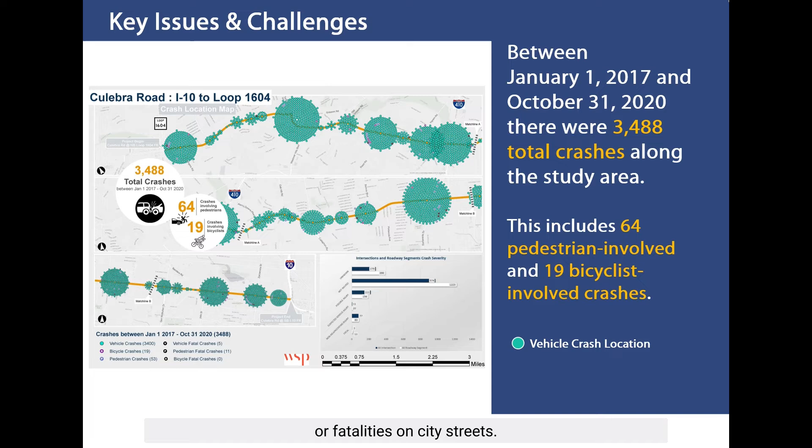This provided the foundation for the Culebra Road corridor vision. The community clearly told us that the number one goal should be safety for all users of the street. Secondly, they told us to manage the traffic speed, slow down drivers, and provide better walking and cycling connections. In addition, we clearly heard the community wants to see shade and comfort settings along the street. This could include new trees, plantings, and other amenities. Also, residents want to celebrate the unique identity of the neighborhoods along the corridor. Lastly, the community clearly told us that this plan and its proposed concepts should help support local mom and pop businesses and create opportunities for economic development.

Now, as we look in this corridor, we clearly see the 5 key segments, and we are going to walk through each of them one by one. Each segment will have 2 proposed concepts. No decision has been made on which concept will move forward, so please be sure to let us know what you like in your comments.

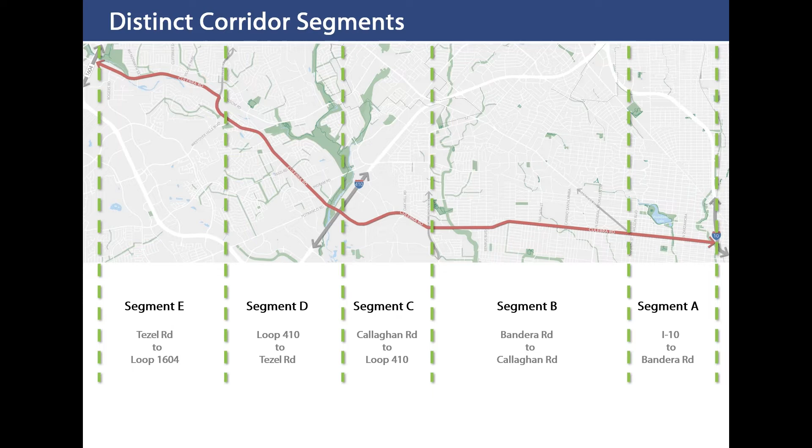The 2022 bond program allocated approximately $18 million that will support infrastructure improvements on Culebra Road from I-10 to Callaghan Road. The bond project is pictured here as segments A and B.

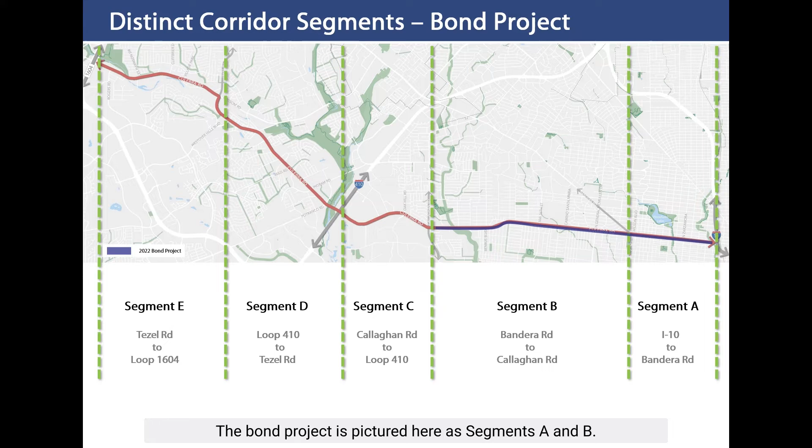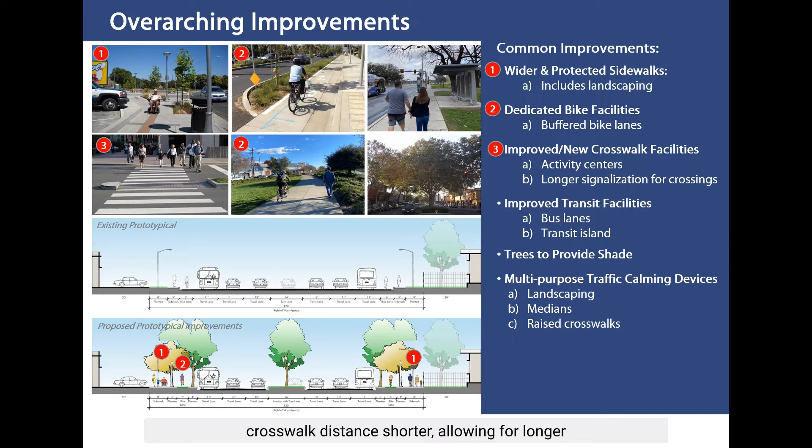Across all 5 segments, there are overarching common improvements. 1. We clearly heard from the community the support for wider and protected sidewalks. 2. We heard the need for a continuous dedicated bicycle path that would be protected from the moving traffic as seen in the photograph labeled 2. 3. We heard the need for improved crosswalk connections and, where possible, new crosswalks at key locations such as near existing schools, trailheads, and other community destinations such as a grocery store. These improvements could include making the crosswalk distance shorter, allowing for longer crosswalk timing, and providing a pedestrian refuge area on shaded mid-block crossings.

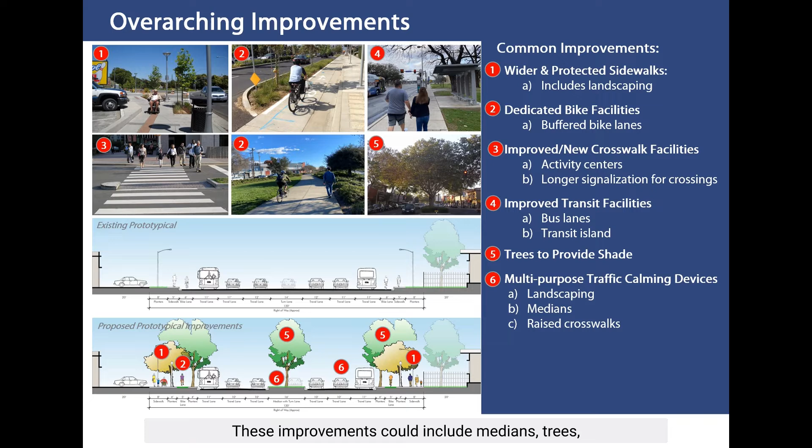4. The community asked us to incorporate improvements to transit facilities and their locations along the corridor. 5. Ensure shade via trees along the sidewalks as well as the medians. The 6th and last common improvement is to incorporate traffic calming devices. These improvements could include medians, trees, reduced travel widths, and better access management for vehicular traffic.

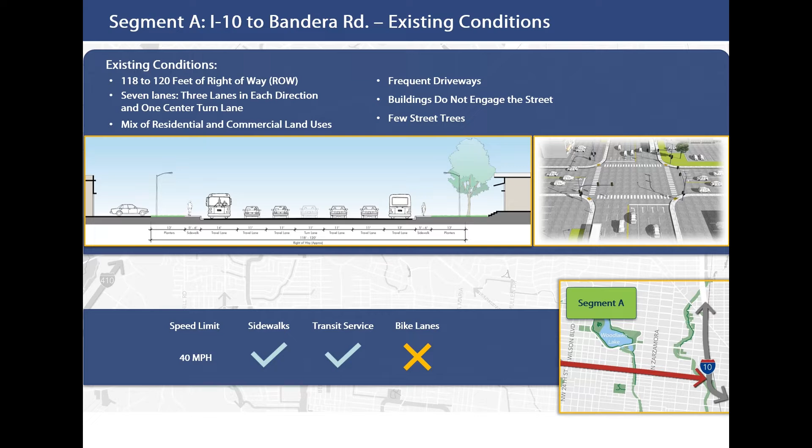The first segment to discuss in more detail is Segment A, which extends from I-10 to Bandera Road. It is about 120 feet wide and has 3 lanes of traffic in each direction with a turn lane in the middle. There is a mix of residential and commercial users with multiple driveways and very few trees. There are no bicycle lanes in this segment.

The first concept for Segment A would include protected sidewalks and bicycle lanes on both sides of the street. These paths would be protected from moving traffic with tree-lined planters. We also propose a median with trees in the middle of the street. This concept maintains the number of travel lanes within the existing right-of-way.

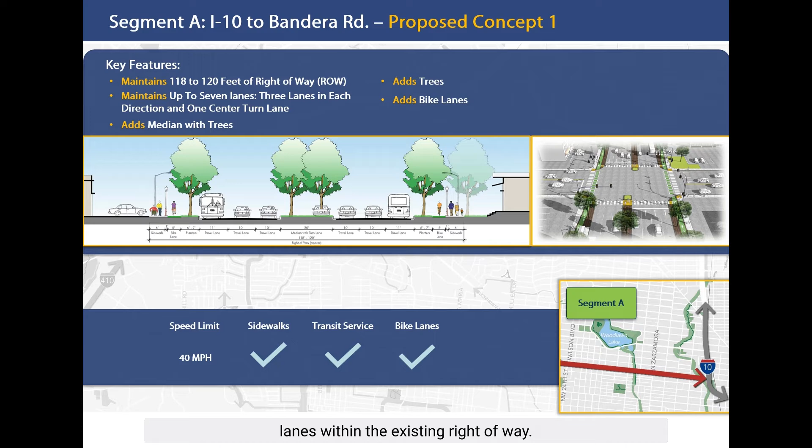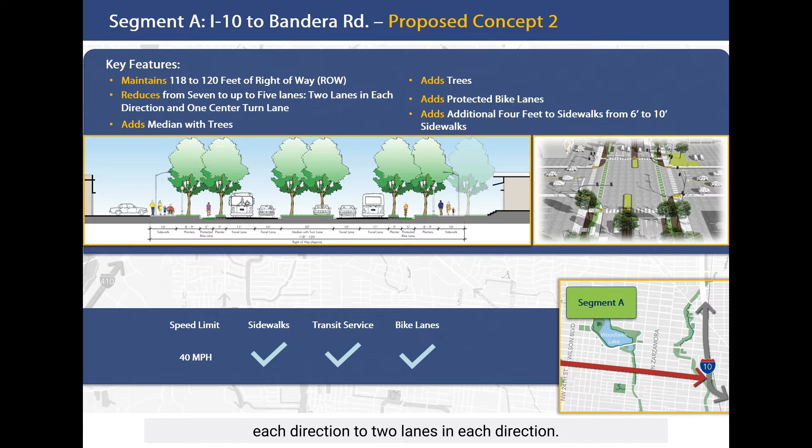The second concept for Segment A reduces the number of travel lanes from 3 lanes in each direction to 2 lanes in each direction. This will allow more space for folks to walk and bicycle along the street and will provide further opportunities for the shade and protection provided by new tree plantings.

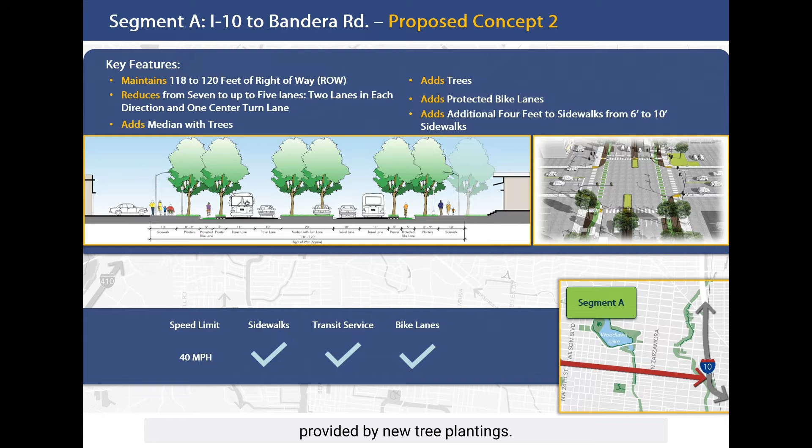The second segment, Segment B, goes from Bandera Road to Callaghan Road. It is a much narrower road, about 80 feet wide, and it has 2 lanes of traffic in each direction with 1 center turn lane. There is a mix of residential and commercial uses on each side and very few trees. There are no bicycle lanes in this segment.

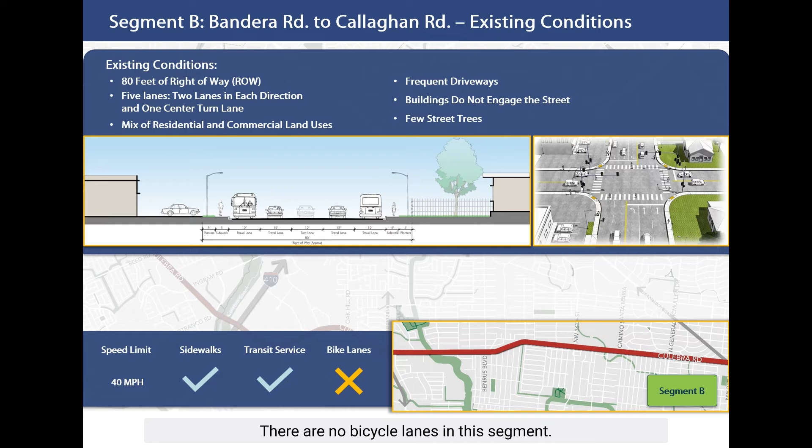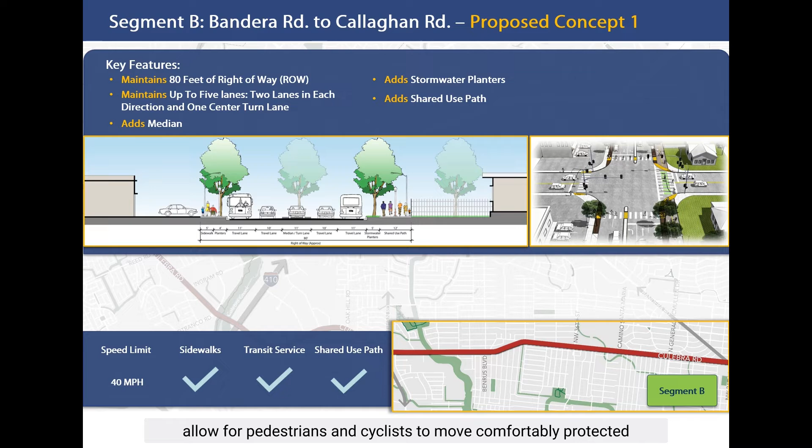The first concept for Segment B would add a shared use path on one side of the street, which would allow for pedestrians and cyclists to move comfortably protected with a tree line buffer. On the other side of the street, we propose a sidewalk.

The second concept for Segment B would include protected sidewalks and bicycle lanes on both sides of the street. These paths would be protected from moving traffic with tree line planters. It has also been proposed to add a median with trees in the middle of the street. This concept maintains the number of travel lanes within the existing right-of-way.

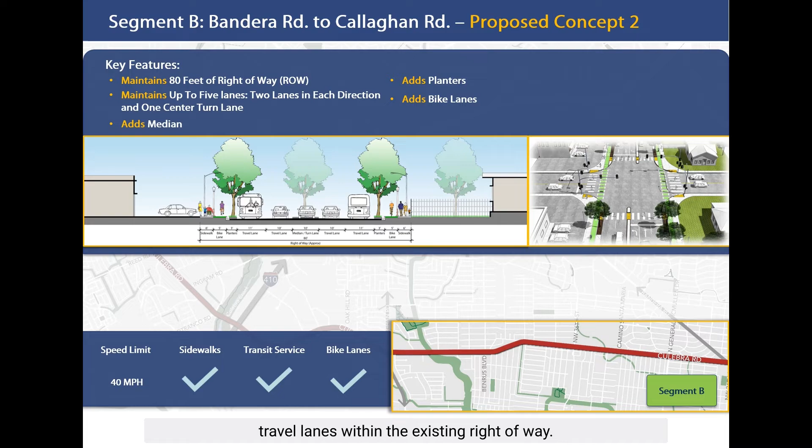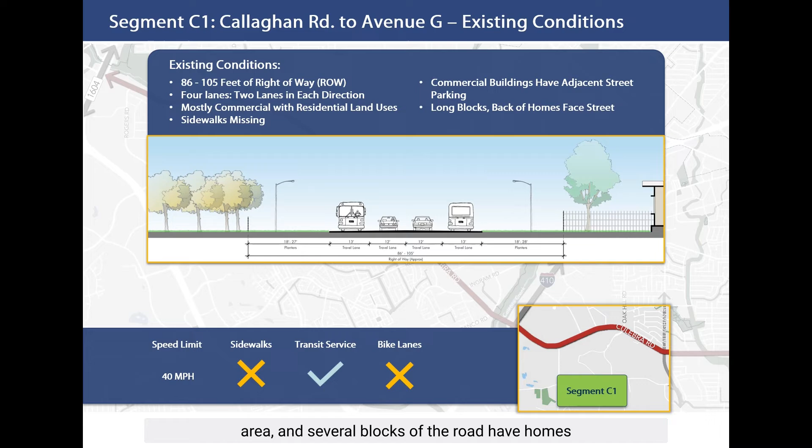We are dividing Segment C into 2. We call them C1 and C2. Segment C1 extends from Callaghan Road to Avenue G. It varies in right-of-way, going from about 85 feet wide to about 100 feet wide. It has 2 lanes of traffic in each direction. There are not a lot of sidewalks in this area, and several blocks of the road have homes that are located very close to the street.

The first concept for segment C1 adds a tree line median and provides a tree line buffer space to protect folks walking and cycling on both sides of the street. This concept maintains the number of travel lanes within the existing right-of-way.

The second concept for segment C1 provides for a sidewalk and 2-way bicycle lanes on one side of the street. On the other side of the street, we propose a greenway with stormwater planters. This is a design element that we clearly heard that the community would like to see in this area.

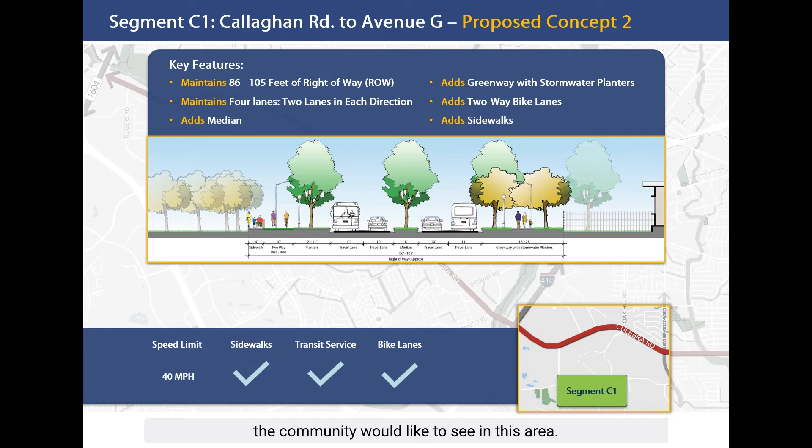Now to segment C2, which goes from Avenue G to Loop 410. It has about 80 feet of right-of-way with 2 lanes of traffic in each direction. It is predominantly commercial, and there are narrow sidewalks. There are no bicycle lanes in this segment.

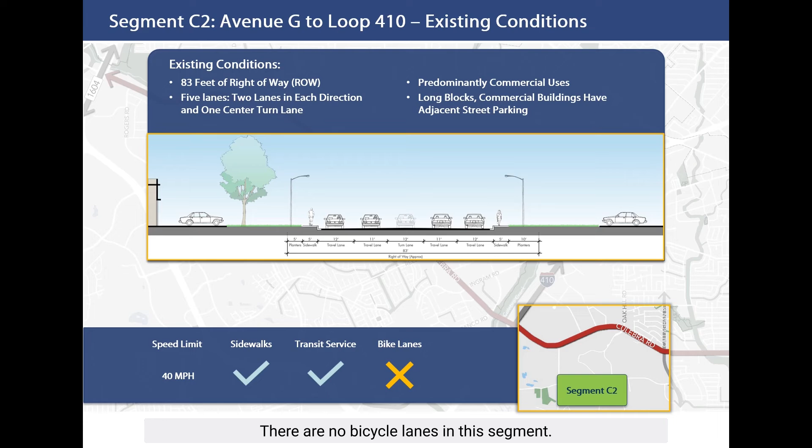The first concept for segment C2 adds a tree-lined median to help calm traffic and provides a tree-lined buffer space to protect folks walking and cycling on both sides of the street. This concept maintains the number of travel lanes within the existing right-of-way.

The second concept for segment C2 provides a shared use path for pedestrians and cyclists on one side of the street and a protected sidewalk on the other side of the street.

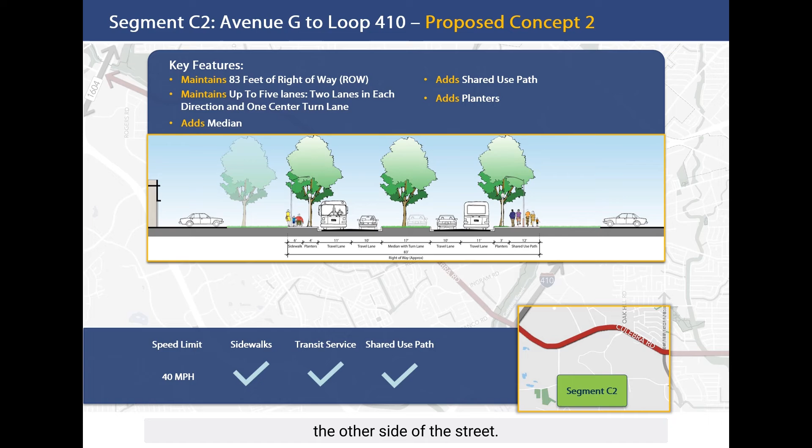The next segment, segment D, is from Loop 410 to Tezel Road. Currently, it is about 120 feet wide with 3 lanes of traffic in each direction and a center turn lane. This segment sees a mix of residential and commercial uses. While we do have sidewalks and bicycle lanes on both sides of the street, they are not buffered from the moving traffic. We heard from the community that folks do not feel comfortable walking or using their bicycle in this segment.

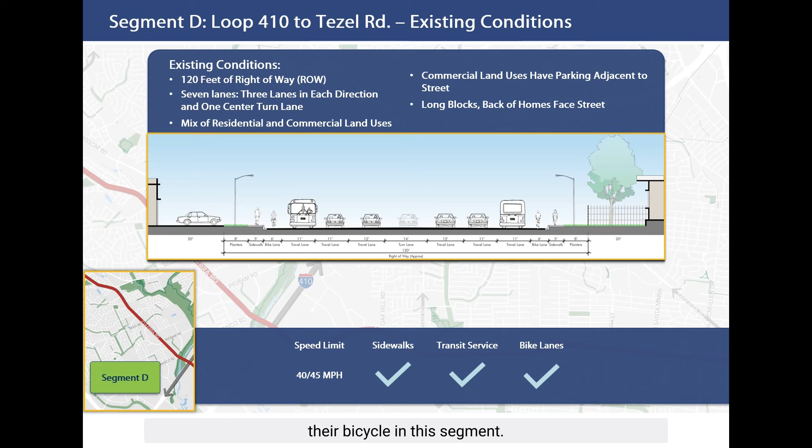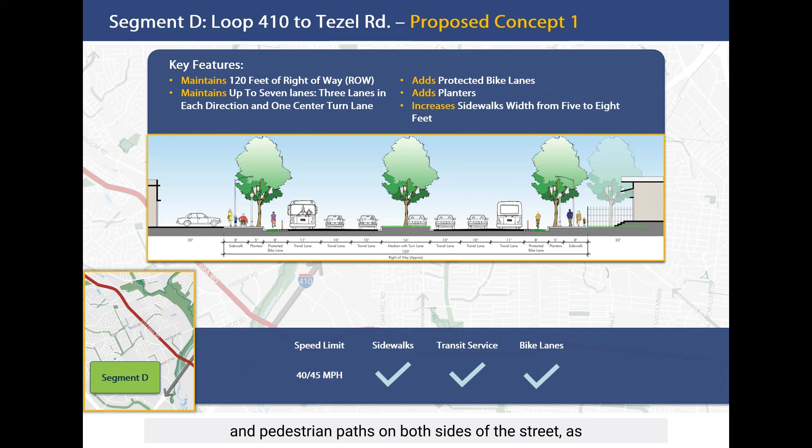The first concept for segment D provides for both bicycle and pedestrian paths on both sides of the street, as well as a tree-lined median in the middle that provides for access management and helps to calm traffic.

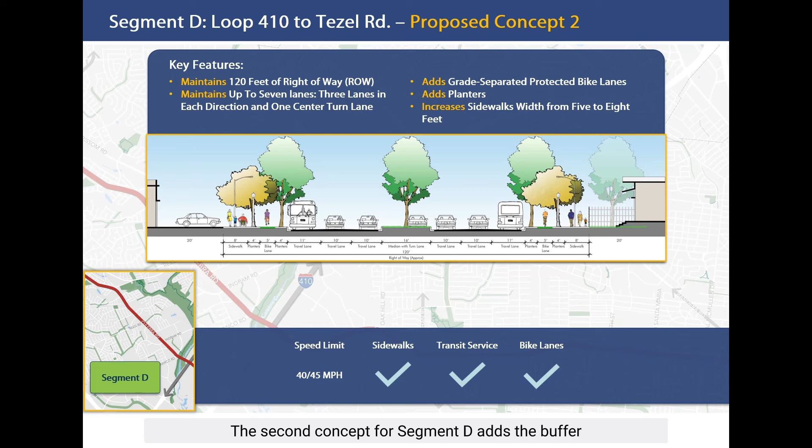The second concept for segment D adds the buffer of a planted tree line between the bicycle and pedestrian paths on both sides of the street.

The final segment, segment E, stretches from Tezel Road to Loop 1604. It is about 120 feet wide with 2 lanes of traffic in each direction. This segment sees a mix of residential and commercial uses. There are narrow sidewalks and no bicycle paths.

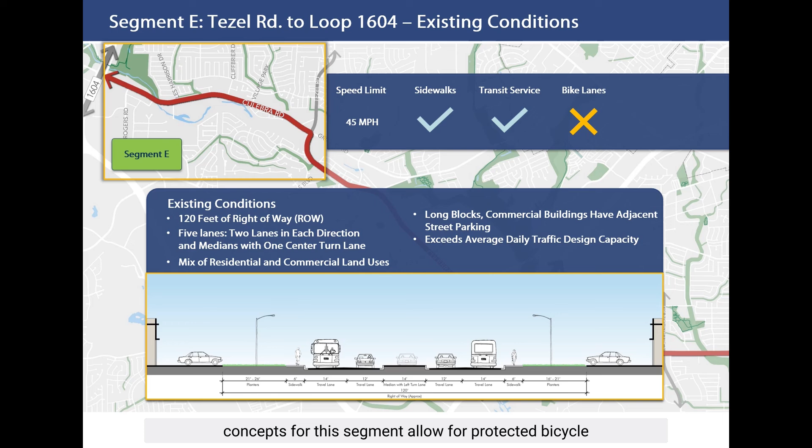We clearly heard from the community that all concepts for this segment allow for protected bicycle and pedestrian paths in a greenway setting. So, our first concept for segment E reflects this vision. Folks can walk and bike safely and comfortably along these tree-lined corridors. We propose a median in the middle that allows for 2 rows of trees to grow.

Our second concept for segment E is a little different, as we narrowed the proposed median to allow for more space for pedestrians and cyclists on both sides of the street.